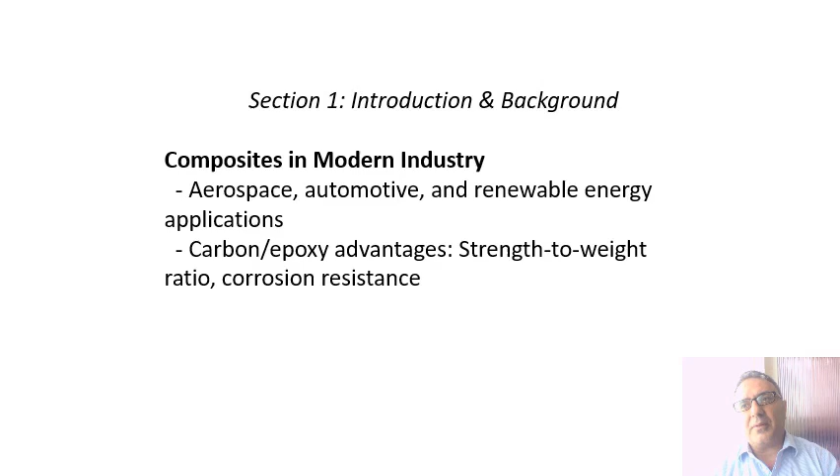We see the benefits in strength to weight ratio and corrosion resistance. This means strong resistance against tensile forces, and we can also use it for impact resistance. If we add carbon, we see this compared with the lightweight properties.

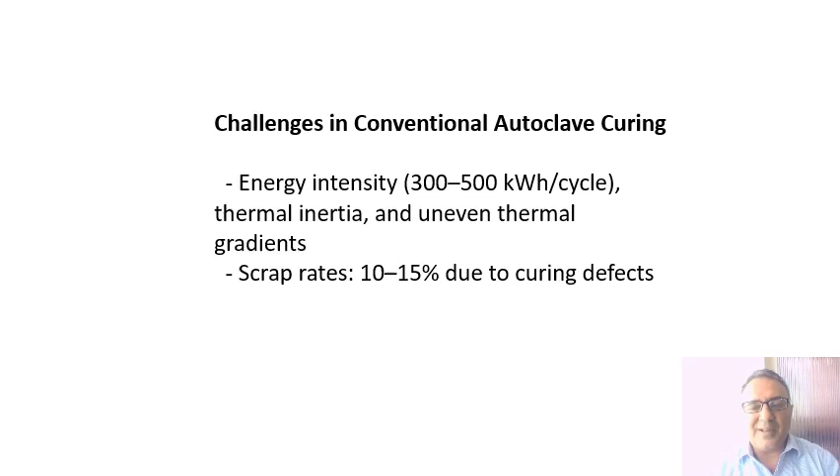Challenges in conventional autoclave curing: we have intensity from 300 to 500, and scrap rates from 10 to 15 due to curing defects. So we need to improve the curing process. Improving curing can be really vital for every university, every firm, every composite industry. It could be one of the challenges, and we are facing this challenge in a civilized and comprehensive way.

Microwave heating fundamentals: volumetric heating versus conductive heating transfer mechanisms. For each part, we compare volumetric versus conductive heating. In an autoclave, once we put the specimen in, the heat transfers from out to in. But with microwave heating, it is from in to out, meaning from inside the specimen to the outside.

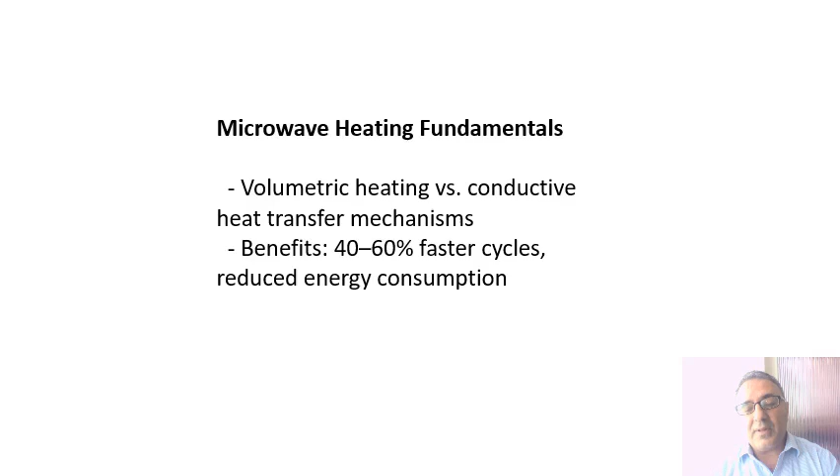The benefit is perhaps half the time, faster by 40 to 60 percent, averaging around 50 percent faster, and it reduces energy consumption. That's why I told you we are going for something sustainable.

The problem statement includes non-uniform heating, thermal runaway, and dielectric property variability. This is the problem we have with conventional or traditional autoclave curing. Now we are moving to autoclave, but with microwave, it could be something different.

The objective of this research is to develop and adaptive AI control for precision microwave curing, to achieve something more precise.

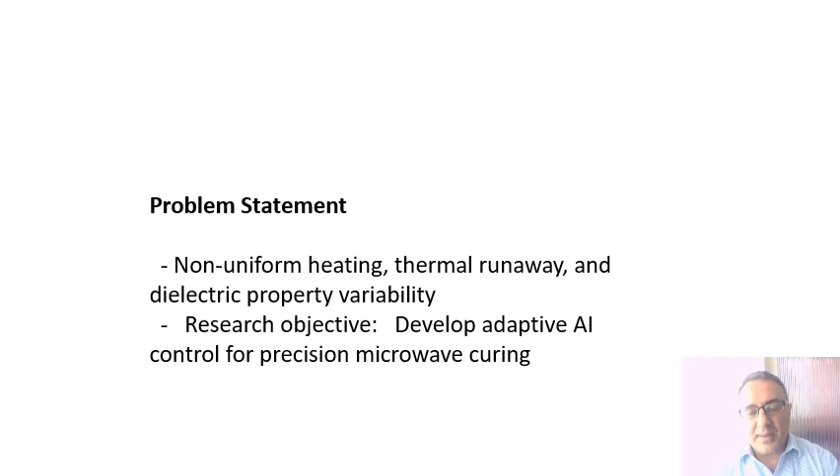Microwave material interaction: the frequency ranges from 2.45 to 5.8 gigahertz in carbon epoxy. It could be really good, though we will lose something, and we aim to make this into something good.

The challenges include the edge effect, where you see problems at the edges, and also shielding, as carbon fiber has some shielding mechanism. This could be challenging for us as well, and we are going to solve this problem too.

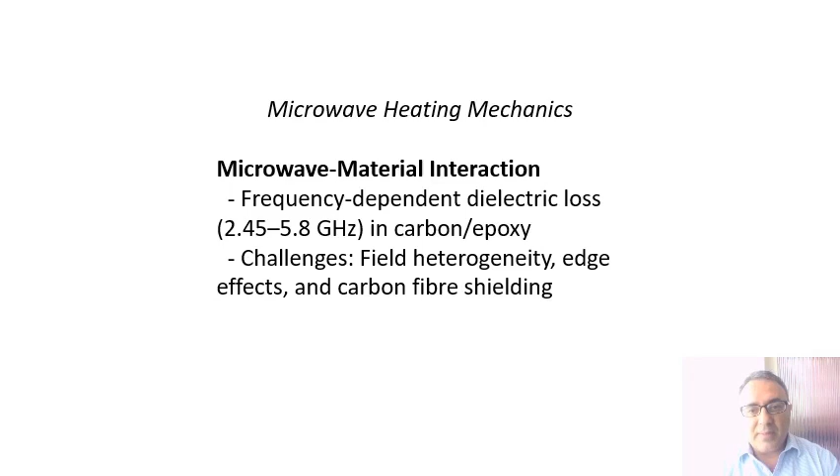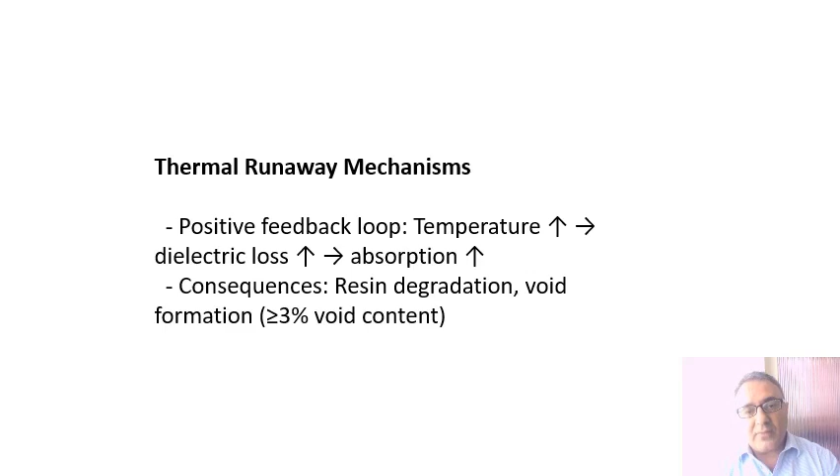Another part we will see for thermal runaway mechanisms - positive feedbacks in the loop. We will see the temperature going up, meaning less energy and dielectric loss going up, and absorption can improve. Consequences include resin degradation and void formation, which can be about 3%. We will see that for 3% as well.

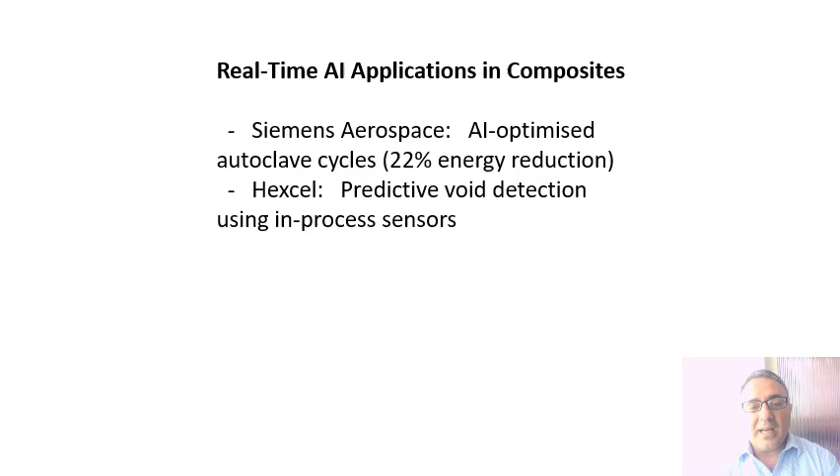Real-time AI applications in composites. The company Siemens Aerospace also used AI to optimize autoclave cycles by up to 22%, meaning really huge, more than 20% energy reduction. Hexcel as well used it for void detection and really got a good result for the sensors.

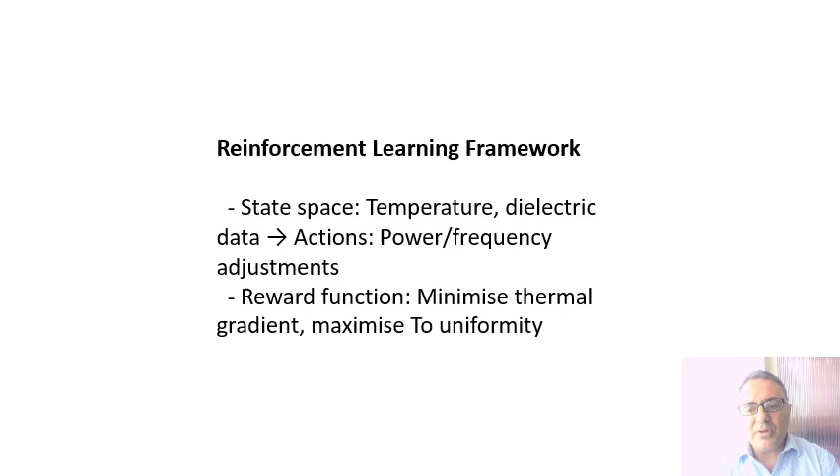Sensor data fusion, prepreg, grating arrays, and also we will see some functions for the imaging. For the imaging as well, we will see some functionals.

Here we will see the edge AI deployment. Very good. Another part here, we could see the closed loop architecture.

For hardware configuration, we use 5.8 gigahertz solid state generators, and it could be a nice sensor and really applicable. Also for industrial IoT integration, nowadays we use real-time data streaming to cloud analysis.

Important also is for materials and specimens, the direction of it, how we can use the direction - 0-90 is recommended for the laminates. How we can find the laminates, we see the standards, even the part of it for 300 millimeter by 300 millimeter. We use that one, meaning it could be large scale as well.

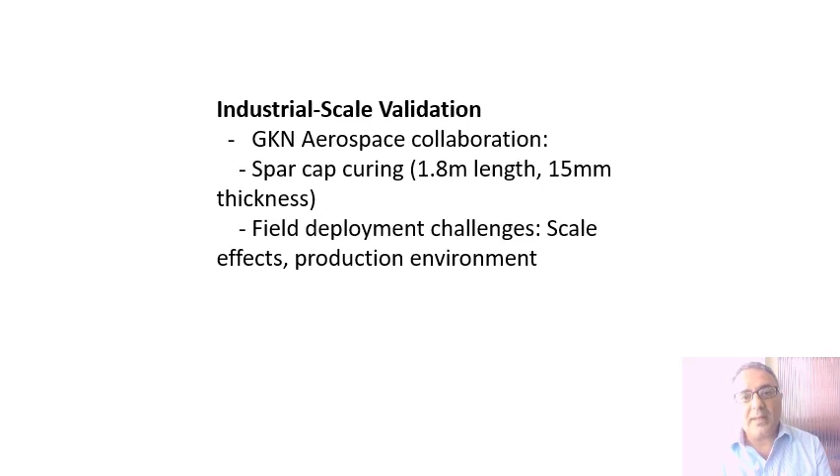And industrial scale validation - GKN Aerospace collaboration, they use that part. We will see the length and also the thickness according to the scale in aerospace, which can be huge, and also the thickness, we will see we are using something tiny as well. Scale effects and production field deployment can really be beneficial, and we will see the advantages as well.

Test matrix, the 3 methods: autoclave, we will see as a reference, we can go for it; the fixed power microwave; and AI controlled microwave. For the autoclave, that is the reference, we are going for it as a benchmark.

Then we can see the fixed power microwave. And by AI controlled, we can use the AI control once we achieve good information, good results, good data by the sensors. Especially we can use the flat sensors - it can be beneficial for this case.

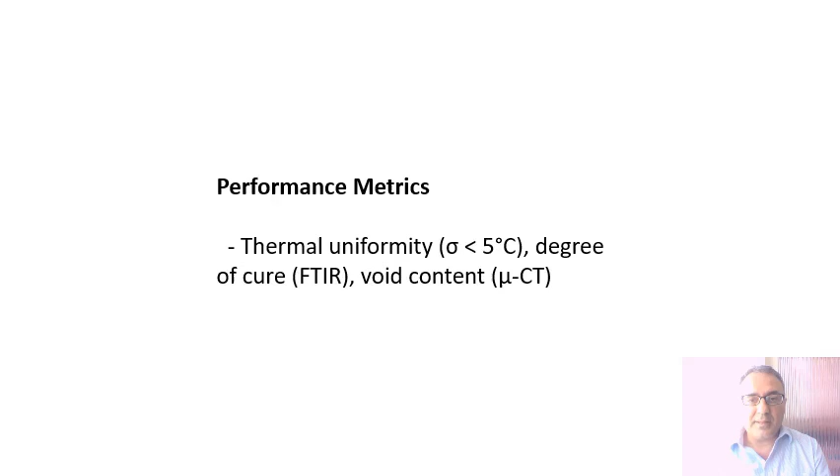The training protocol, you will see the AI training control - I told you for that one. We should go for the ANSYS software for physical validation, and we can go for it for transfer learning. Once we collect the data, validated data, we can go for machine learning as well.

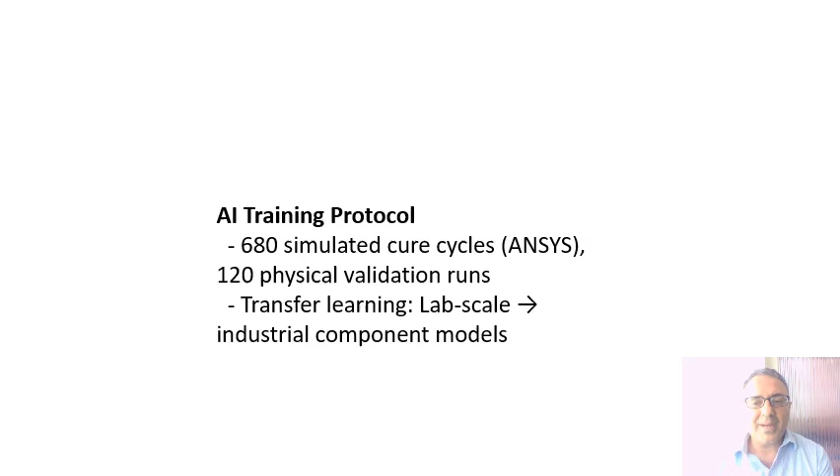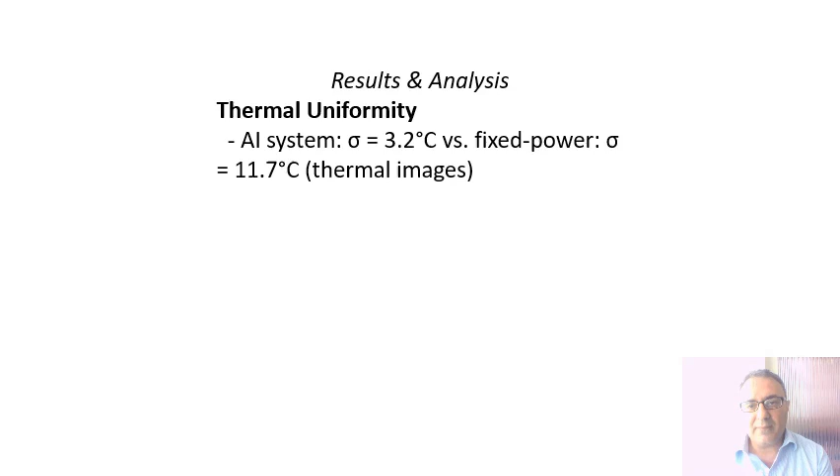The thermal uniformity, by employing the method I told you, we can go for the thermal uniformity as well. The thermal difference can be only 3.2 versus 11.7 Celsius degrees. It can be really beneficial, really good efficiency and effective in our work.

Curing, how we can use this for curing, we will see. Also the AI and the control we use, you will see employing the AI, how much difference we will see.

As well for the void content, we will see 0.3% means nothing. It's amazing. If we calculate easily, it can be maybe 9 times better than the previous one. You will see for the energy efficiency, around 50%, 48%. It can be 50%, and for another part it can be really effective.

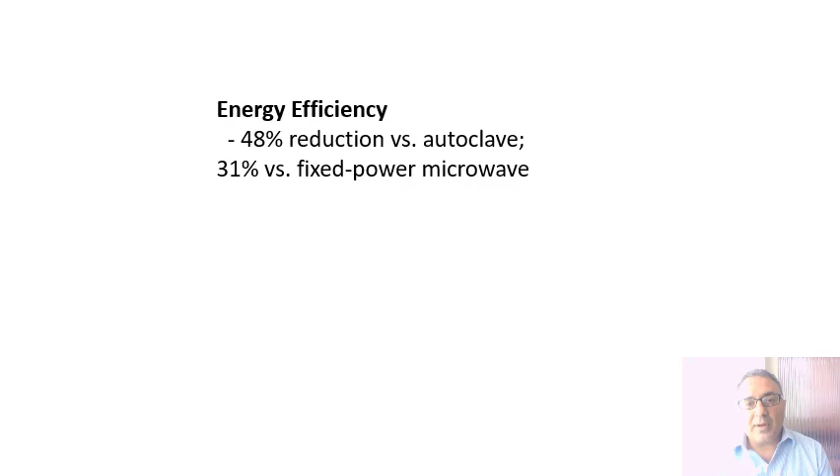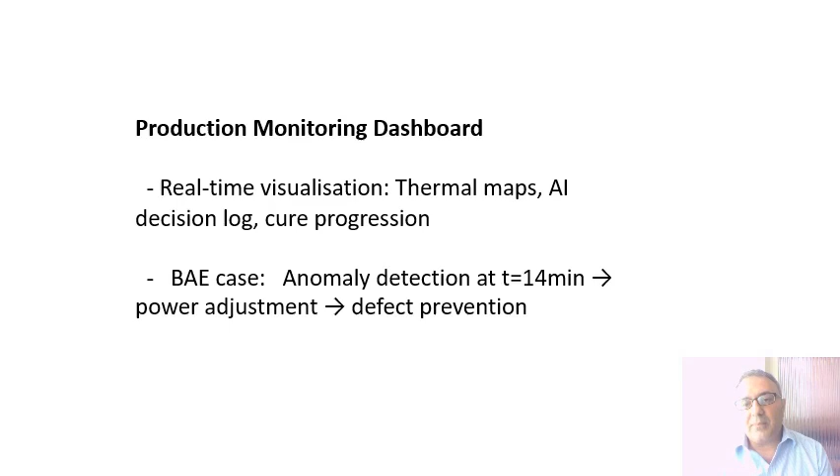Production monitoring dashboard for real time, even for controlling, perhaps by mobile phone application you can control it and monitor it, and observe the data from that part. You will see, just for the BAE case, we achieved it in maybe about a quarter, or maybe 14 minutes only. We will see for the power adjustment. It means excellent.

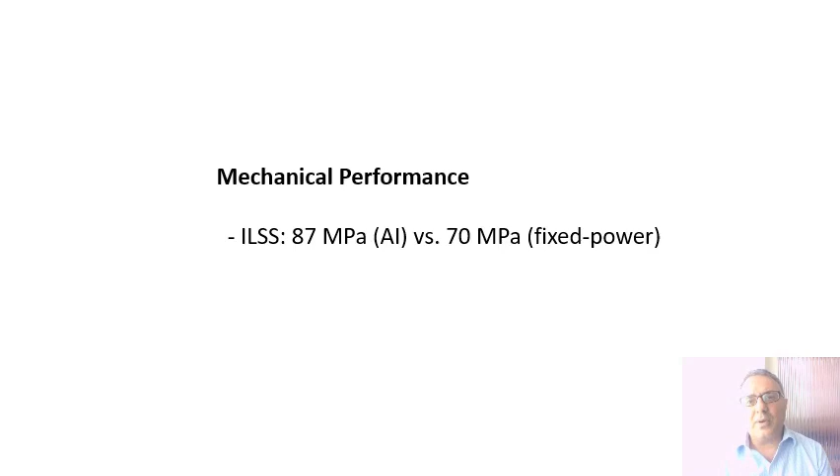For another part, we will see that for the mechanical performance, once we go for that, 87 megapascal versus 70 fixed power, we will see the improvement, at least more than 12%. We will see the improvement, really increasing the stiffness and stiffener of the result. Here we will see by the temperature as well, and also for the gradients, it could be really beneficial.

For that part, also we will see the validation of the result. We will see the p-value according to the statistical data. We will see the p-value is excellent. We achieved a good result.

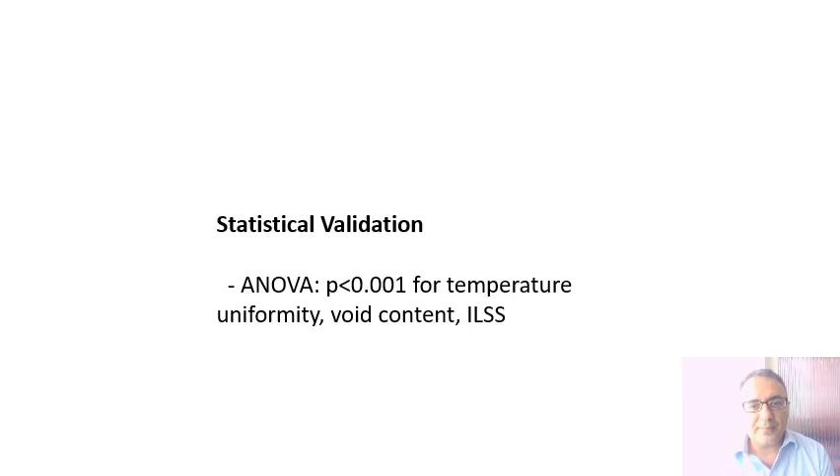EMI, the interference, can be good, and the solution, I told you, the fiber optic can be good. I suggest for that case the flat fiber optic sensors. It is my personal suggestion, it is out of this research.

For another part, we are going for adaptation from university or lab scale to industrial adaptation. We can go for that with RL, we can also go for digital twin. Nowadays we are using 5G, next year maybe we are going to use 6G. We are going to improve the digital twin as well.

In the future, we are going for the hybrid heating system, microwave plus RF. It could be for the future, and also the thickness, it can be good for 3D printing. For 3D printing as well, it can be recommended.

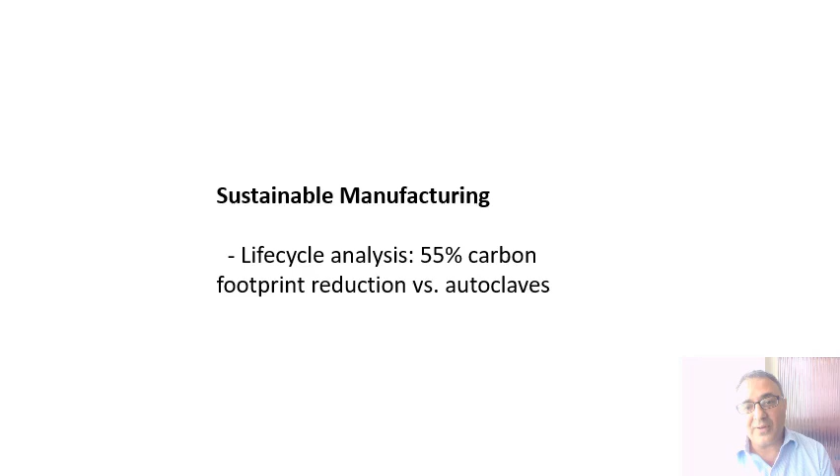I told you for something sustainable, life cycle analysis, about 50%, half of it for the reduction of the footprint in the world, more than 50, 55, compared with the autoclave.

For that one, we are going for the manufacturing platform. For that part, we can go for the blockchain and also the secure knowledge sharing. We can achieve that part.

And another thing, the stakeholders are looking for the economic impact. Stakeholders and also people investing, they are looking for it. We should respect them, they are preparing us money. Economic impact, we will see that part. Really, we will see the cashback and the money back, the payback for that part.

3.3 years, we will see that. The scrap reduction as well. For the case, we will see the Rolls-Royce trial going for it, maybe 28% faster cycle, and also the saving per line. We will see that huge amount, for Rolls-Royce it is 410,000 per year sterling pounds they are going to save.

For concluding remarks, we will see some achievement for AI. We are using AI for something precise, 70 to 80% thermal gradient reducing, a valuable alternative to autoclave for complex components. For the future, we are going to see how to make it standard, full-scale production development.

Before we go to the last section, the Q&A, I want to add something. It is a pilot study, and it can be a review of something, because due to the shape of each component, once we put it into the microwave for curing, the edge of it could show different behavior and different thermal gradients. We are studying that part, and hopefully with your help we are going to develop it in a better way. So after that, we are waiting for your questions, and hopefully I will receive them.